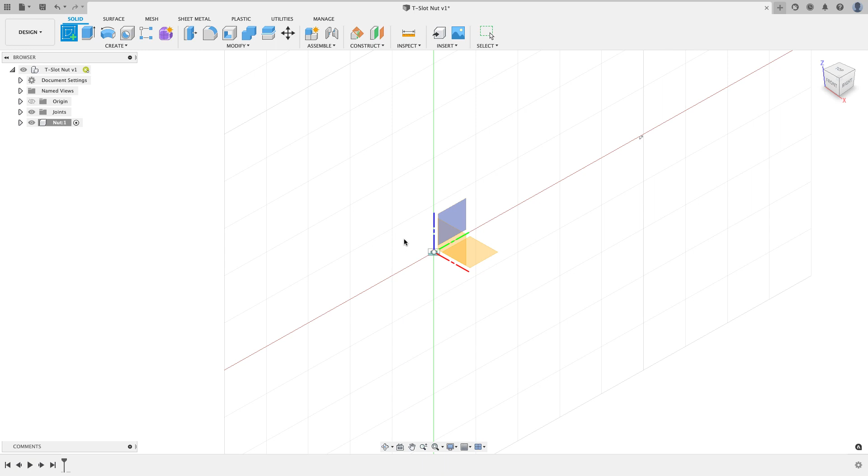I'm going to create a sketch on the front plane, and I'm going to grab the 2-point rectangle, but I really want the center point rectangle. Rather than going through the menu, I'll just come over here to the sketch palette and choose center point rectangle. Drag this out. For a height, I want this to be 0.5625.

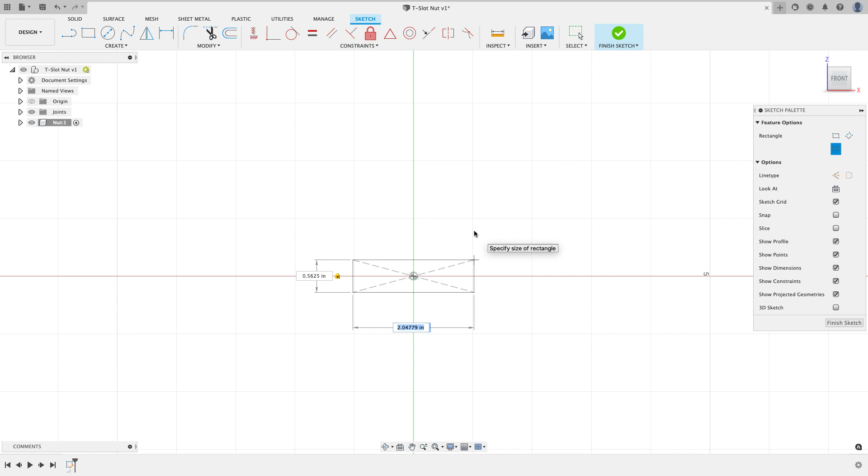For a width, I want this to be 22 millimeters. Now I'm working in inch units right now, as everybody should—sorry, kidding, that was a joke. I'm working in inch units, and rather than converting it, I'm just going to have Fusion do the heavy lifting for me. I'm going to type in 22 and then put mm after it, and Fusion, when I hit enter, will convert that number for me, and I don't need to know what the conversion factor is.

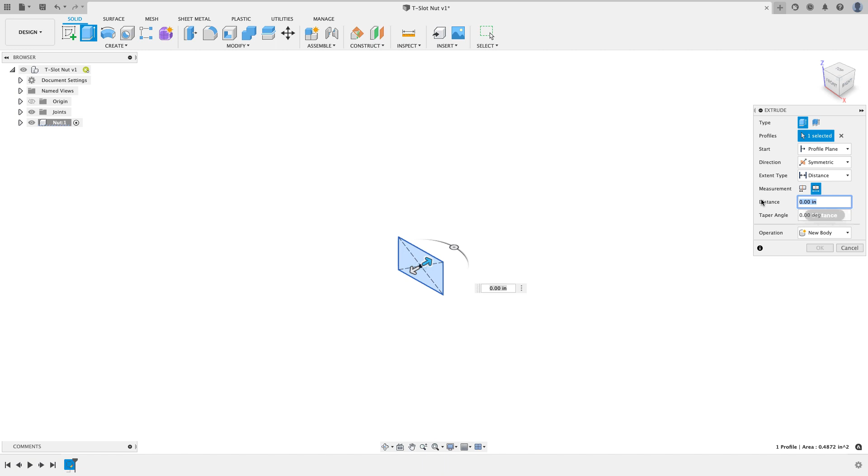I'll finish the sketch, and now I'm going to extrude that. I'm going to extrude it symmetrically, a total distance of 1 inch. My stock pieces are about 1.03 inches, so I should have enough to clean up all of these pieces.

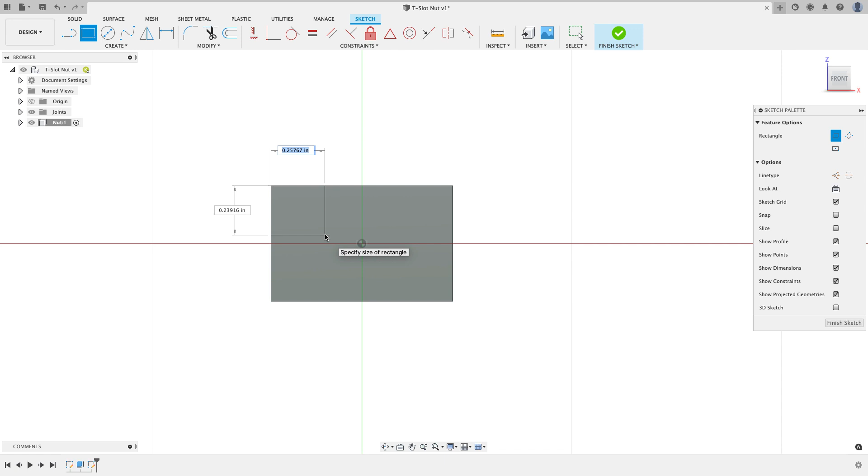Now I need to put the little shoulder cuts on, so I'm going to create a sketch again on the front face of the part, and I'll use the 2-point rectangle this time, anchored to the upper left. I don't know what the depth is, but I'm going to hit tab because I know what the width is, so I'll type in 0.125. I'll hit D for dimension, and from the bottom edge to the bottom edge of the rectangle, I know that's 0.335. I'll hit enter, and finish my sketch.

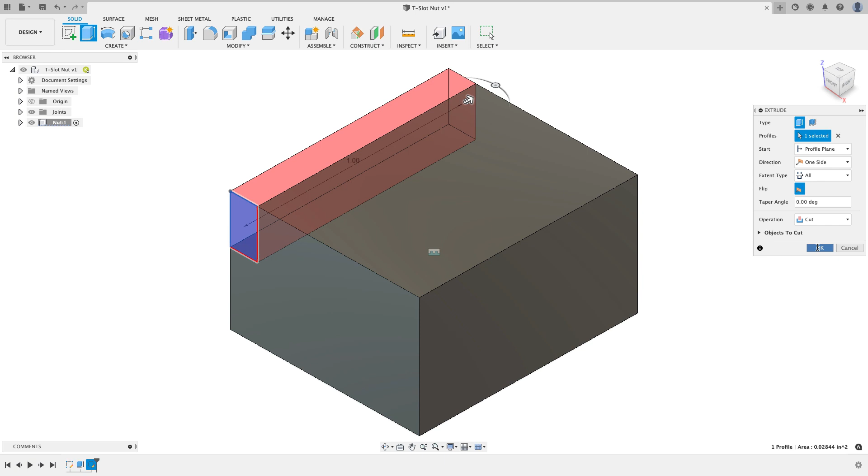Now I can extrude that. I'll just pull it the direction I want to go. For the distance, I want it to go all the way through, so I'll choose all, and then hit OK. I want to mirror that to the other side, so from the create menu, I'm going to choose the mirror command, and it's set to mirror faces. I want features, which means I can either select it on the model or grab it on the timeline. Either way will give you the same result.

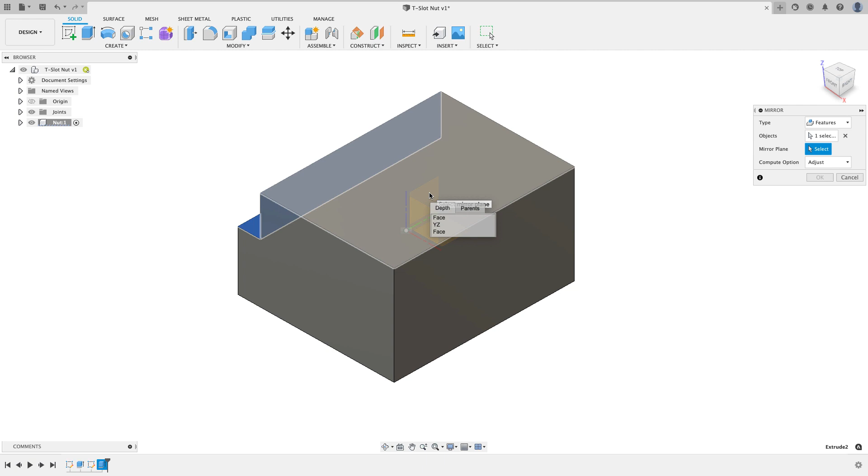And on the mirror plane, I want to use that origin plane that I can see, which is a little hard to get to right now. However, if I just put my mouse over it and I left click and hold until the select other menu appears, now I can stop left clicking and click on my YZ plane, and I get the preview of the cut. I'll hit OK.

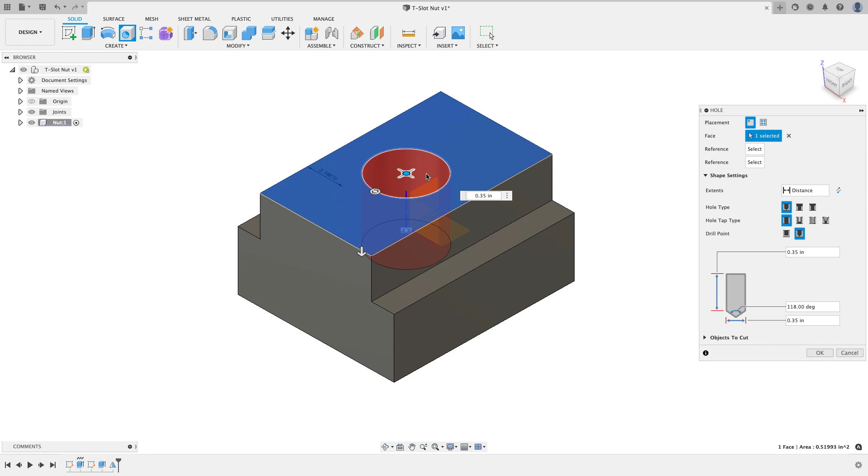The last thing I have to do for CAD work is to put a hole in the center of this part. So I'm going to start the hole command, and I want to put it on this top face, and usually people's inclination is to select exactly at the center. I want to select off the center. Now I can take that blue dot and drag it to the white dot, and when I have it there, I can set my distance as all.

I want this to be a tapped hole, and then I'm going to select a nominal 1/2 inch hole, and the thread designation is going to be 1/2-13, and I'll hit OK. And now the CAD work is done. It might be a good idea to save here. Now I can switch over to the manufacture environment.

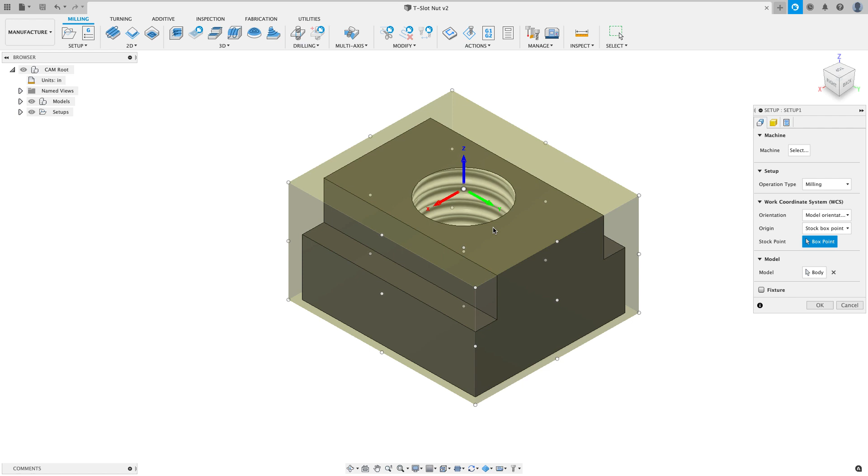I'm going to rotate my model slightly. This is how I'm going to be looking at it in the vise. And so I'll say I want to create a new setup. I want to change the X direction. So I'm going to click on the base of the X, and the face I want to be perpendicular to. So my work coordinate system is now where I want it.

And I'm just going to go to the setup tab. Let me drag this out so you can see the names. I'm going to go to the stock tab and choose a fixed size box. And the first thing I like to do is set my round to nearest field to be 0. Now my stock and my part are exactly the same size. So I'm going to tell my stock it's a little bit longer than what it really is.

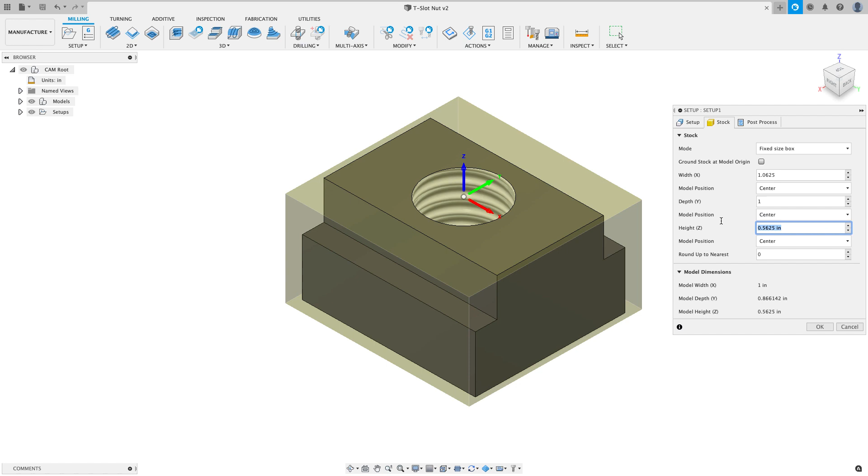So most of the pieces, like I said, are cut to about 1.03. I'm going to say that this is 1.0625. It never really hurts to say your stock is a little bit bigger, and it can hurt if you say your stock is a little bit smaller. On the Y, my stock is going to be 1 inch. And for the Z height, it's 0.75. If I look at my stock, it's split the stock equal top and bottom.

I want to change the Z model position to offset from the top. And I'm just going to take about 10 thousandths off the top to clean the steel up. And that should do what I want. And then on the post process tab, I'm going to change my WCS offset from 0 to 1 and I'll hit OK. That'll give me a G54. So now I'm ready to start adding tool paths to my part.

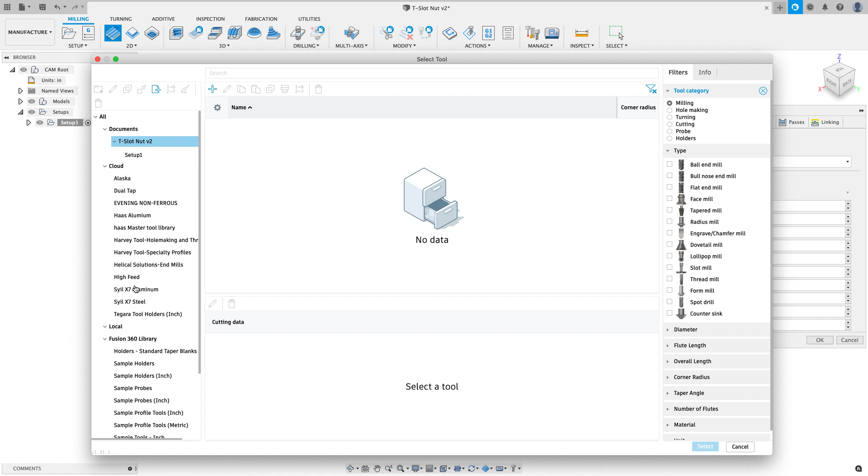Now I should note, I've already pre-set up my tools with the right feeds and speeds for what I want for this material. So I won't be picking any feeds and speeds. I'll just be picking tools as I go. I'm going to choose the facing operation and I'm going to go select a tool out of my Syil X7 steel library. And I'm going to start with this 3/8 inch helical tool. And you can see I've got a couple presets for adaptive clearing and contouring.

I'm going to just select the tool and then I'm going to use air on the geometry. I'm not going to select anything. On the heights, it's going to go from the stock top to the model top, which is good. On the passes, I'm going to do a pass extension of 0.2 inches and I'm going to do a stock offset of 0.1. Just make sure it cleans everything up.

Now it defaulted my step over to what my adaptive clearing step over is. I can get away with a much larger step over here. So rather than using that 0.045, I'm going to right click and say reset to system default, which is slightly less than 3/8 of an inch. And I'm only going to climb mill this tool path. Linking tab, I'm going to choose extend before retract to get the tool all the way off the stock before it retracts and hit OK.

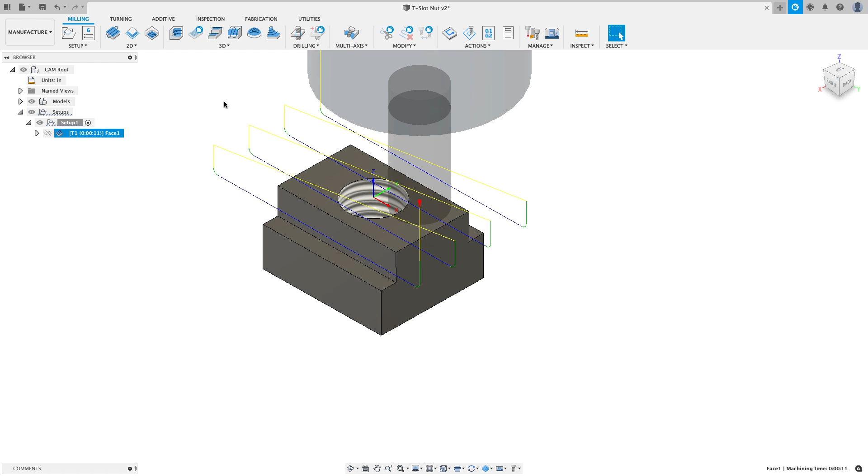And there I should just get a simple facing operation. I'll do a 2D adaptive clearing with the same tool. Again, air, and then for the preset, I'm going to hit the drop down and say adaptive clearing is what I want to use. For the geometry, I'm going to click on the top edge right there. So you get kind of a blue preview.

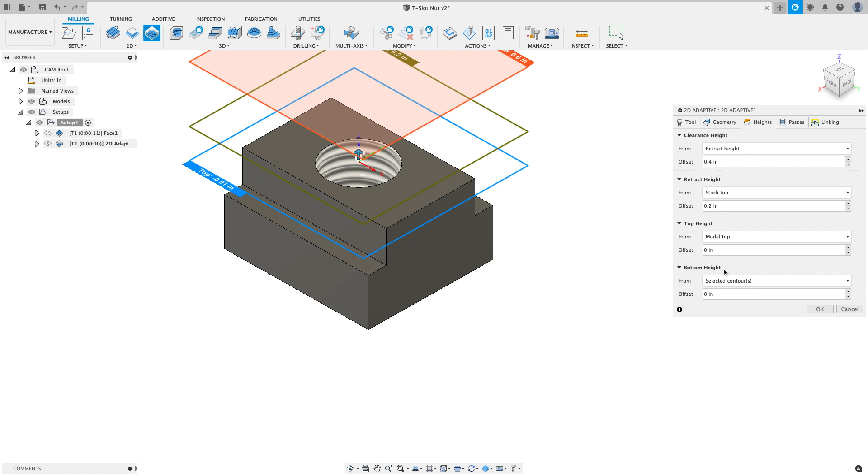Now there's really not that much meat there. We'll see if Fusion even puts a tool path on the different ends. If it does, great. If it doesn't, that'll clean up in the 2D contour pass. Because I selected at the very top of the part, I selected at the wrong height. So for the top height, I'm going to say model top because I faced it to that level. And for the bottom height, I'm going to say a selection and I'm going to choose that face right there.

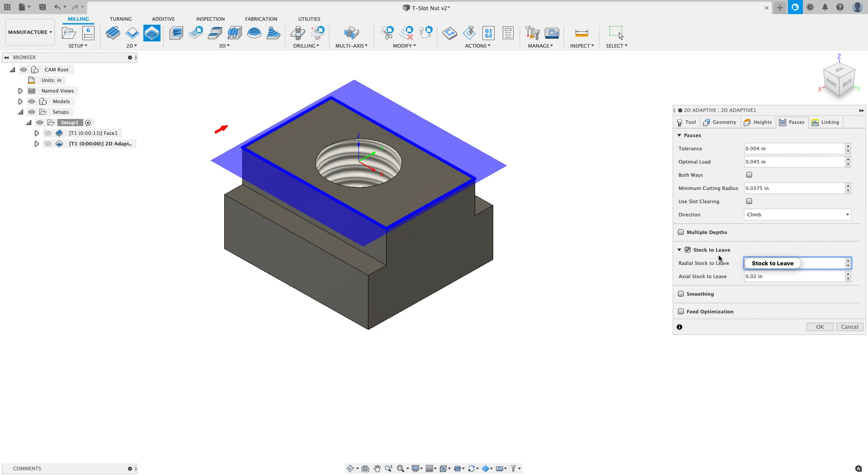On the passes, my 0.045 step over is about 12% of the tool, is what my step over is set to for the steel part. And if I were to turn on multiple depths, it will go 3/4 of an inch deep. I don't need multiple depths for this first step, so I'm not going to enable that. I want to leave about 20 thousandths of an inch of stock radially and axially.

And then I'm going to go over to the linking tab. I'm going to make just a few changes here. I'm going to set my stay-down level to 70%, and my lift height to be 0.01, and my low engagement feed rate, I'm going to set that at 1,000. My machine can't do a cutting feed rate of 1,000 inches per minute, but what it will do is go as fast as it can, and the control doesn't mind if I put a larger number than what it can do. It just changes it to as fast as it can go. So I'm happy with those numbers.

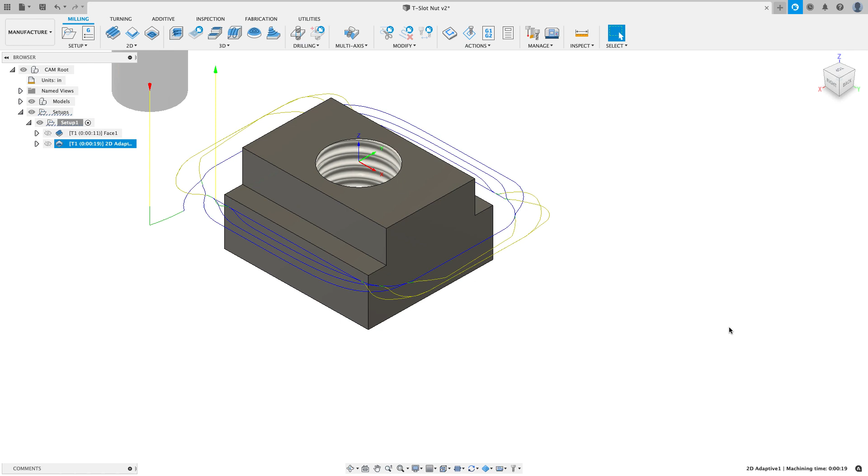I'll hit OK, and now I get my adaptive clearing for that very first step. I'm just going to right click and duplicate that, and I'll edit that. I'm going to throw away my geometry. I'm going to select the new geometry at the very bottom of the part. And then on my heights, I'm going to make a couple adjustments. I'm going to say I want to go from a selection, which is going to be that face, to selected contours, or I could say model bottom.

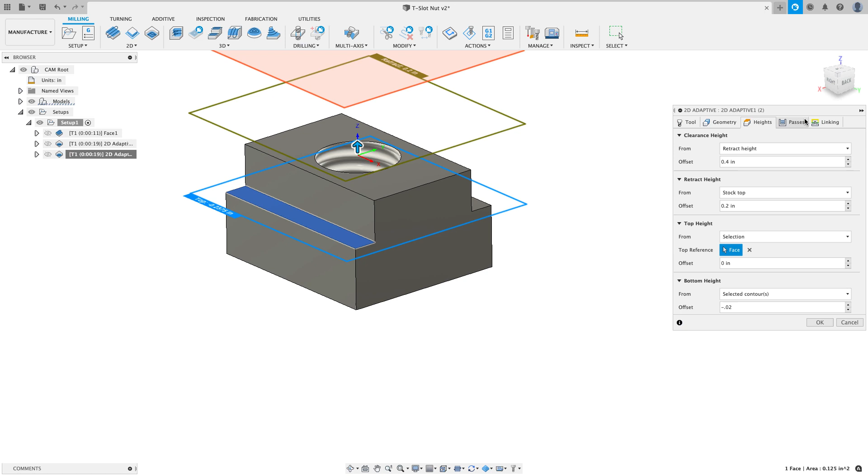And now I want to cut past the bottom of this part by negative 0.02 inches. I'm going to go 20 thousandths of an inch past. The passes should already be all set up for me based on the previous operation that I did. Same with the linking. So now I'll hit OK. And there I get a tool path that just goes and roughs the outside of the part. Now I can work on cleaning the part up.

I'm going to start out with a 2D contour. Same tool. I'm going to click on this edge for the geometry. For my tangential extension distance, I'm going to do about half the distance of the tool. I'm going to type in 0.15 here. That's going to make the tool start in space and end in space. It'll start farther away from the geometry. On the heights, stock top to selected contours is fine since it's only doing one step down.

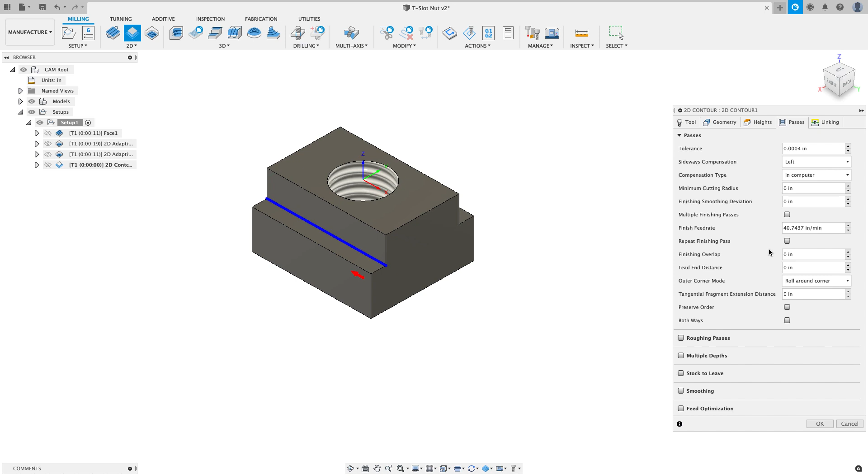And on the passes tab, I'm going to turn on repeat finishing pass. I want to change something in the linking, but before I do, I'll hit OK. And you can see that the tool's doing 90-degree lead in and lead out. I don't need that. I'm going to edit this. I'm going to go back to the linking tab and I'm going to change my lead in sweep angle to be 0. Now what it'll do is it'll go across, retract, come back, make another pass.

I want to do the same thing on the other side. So I'm going to right click and say duplicate this operation. I'll edit this, go to my geometry, throw away my previous selection and click on the new edge and hit OK.

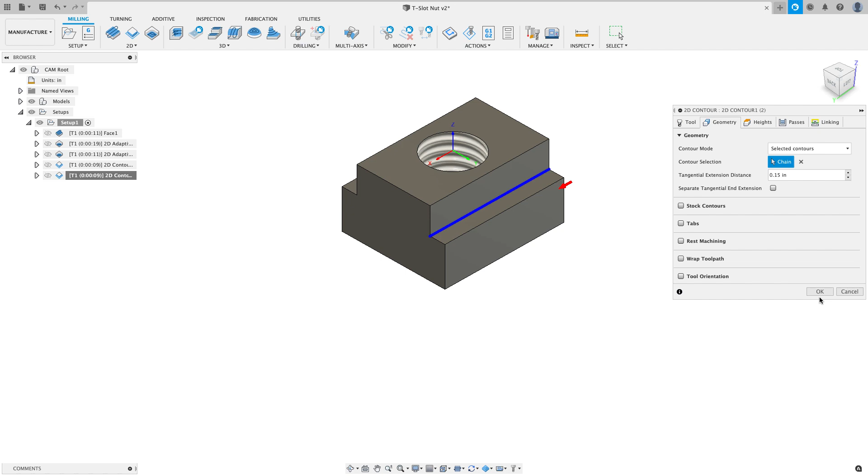And now I've got that cleaned up. I can do that one more time. I can just right click and duplicate that. And I'm going to edit this and I'll go to the geometry, toss that, and choose that edge right there now. Still for the heights, my part is only 0.5625.

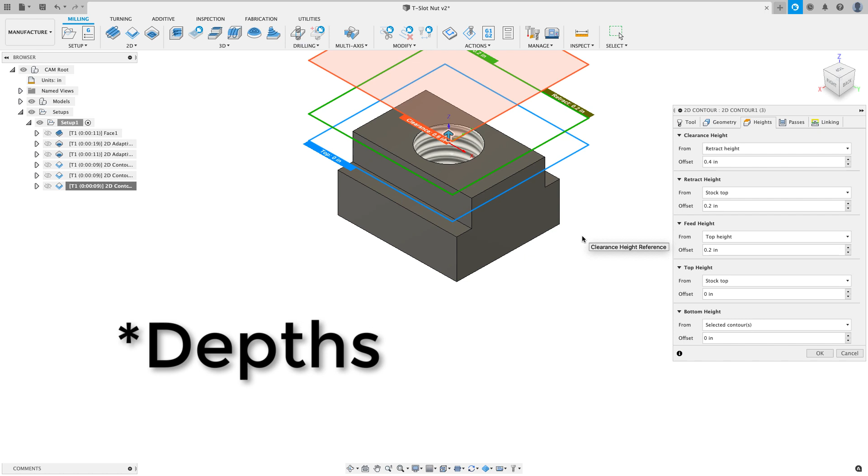I know I can comfortably go 2 times the diameter, so 0.75 deep, so I don't need multiple passes or anything like that, and this is just the cleanup pass around the outside. So I'm gonna go from the stock top to the selected contours, and I'll say minus 0.01. I will go past the bottom just a little bit to clean that up.

And then in the passes tab, I'm going to turn on an option that I don't think people use a lot, which is, actually, let me just hit OK so we can see what we get here for toolpath. So there's what my toolpath looks like. I've got my 0 degree lead in, lead out on, and that's why it's starting in this corner. What I want to do is I want the tool to start off in space, come in, make a lap around, and then finish off in space.

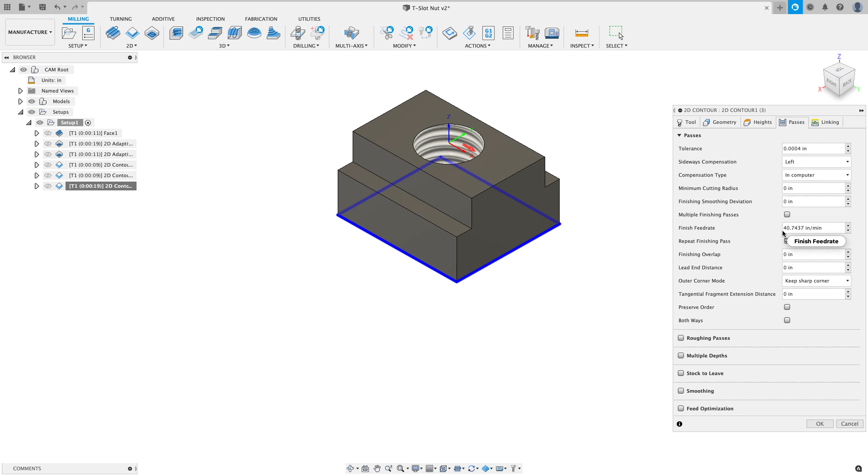So I'm going to edit this toolpath, go to the passes tab, and under outer corner mode, instead of roll around the corner, I'm going to say keep sharp corners. I'm also going to enable repeat finishing pass, which is already turned on because I copied it from the previous operation. I'll hit OK, and now I get exactly the result that I want.

Although it's not starting maybe as far off as I'd like, so I'm just going to go to the linking tab, and I'm going to change the linear lead-in distance to 0.1. Now when I hit OK, you'll see that there's a longer lead in on that toolpath. It really doesn't add any time, but it ensures I really start out in space.

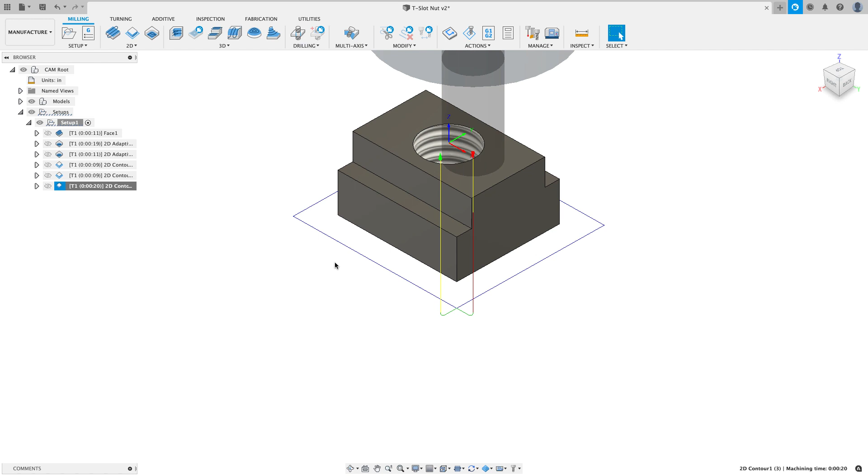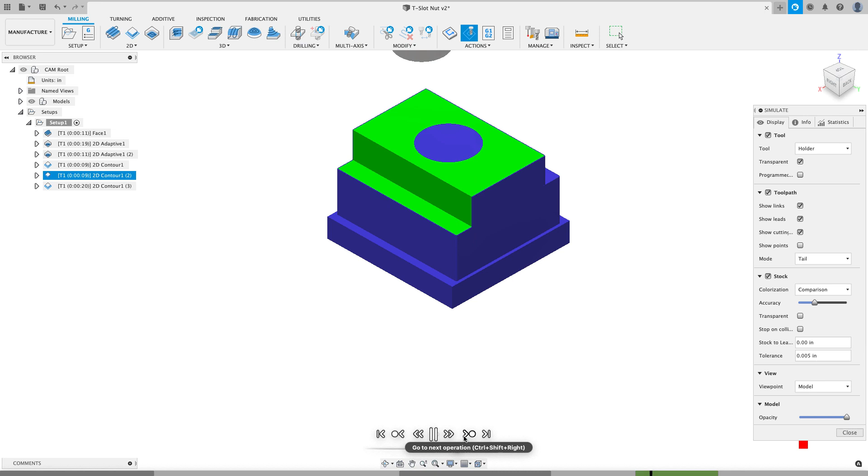So now if I do a quick simulation, at this point, I'll turn the transparency off. If we hit play and let this run, you can see we get the facing operation. Then we get our adaptive clearing that roughs the majority of the material off on the first step, finishes the second step. Then we do a contour pass, another contour pass, and a contour pass all the way around the part with a finishing pass, and away we go.

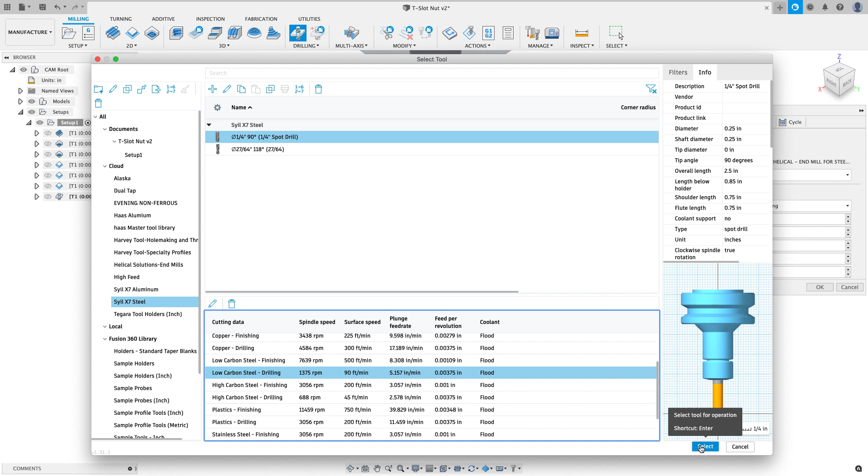So I'm just gonna go down to low carbon steel drilling. This is a tool I copied from the Autodesk tool library and just put my holder on it. And then now I'm gonna go to the geometry and click on this hole face. And for my heights, I'm gonna say hole top for the top height, but for the bottom height, I'm also going to say hole top.

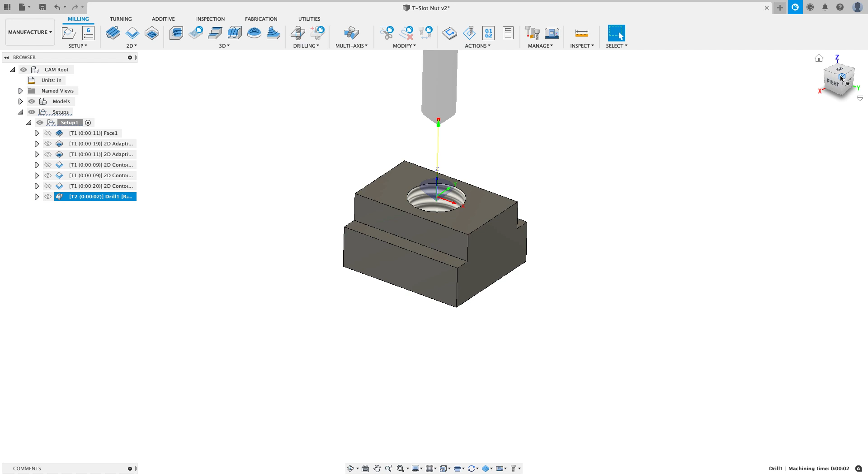And then in the bottom height offset, I'm gonna say negative 0.03. Maybe I'll just peck down 30 thousandths of an inch just to get a little point there. On the cycle, drilling rapid out will be fine. And there's my preview of the spot drill that I'm going to do. I'll come back and do a drilling operation now.

I'm gonna select my tool again out of the Syil X7 steel library, grab my 27/64 drill, and again, low carbon drilling. For the hole, I'm gonna select on that face, and for the heights, hole top to hole bottom is fine. I wanna drill through the bottom, and I'm gonna put a 0.1 or 100 thousandths breakthrough depth on there.

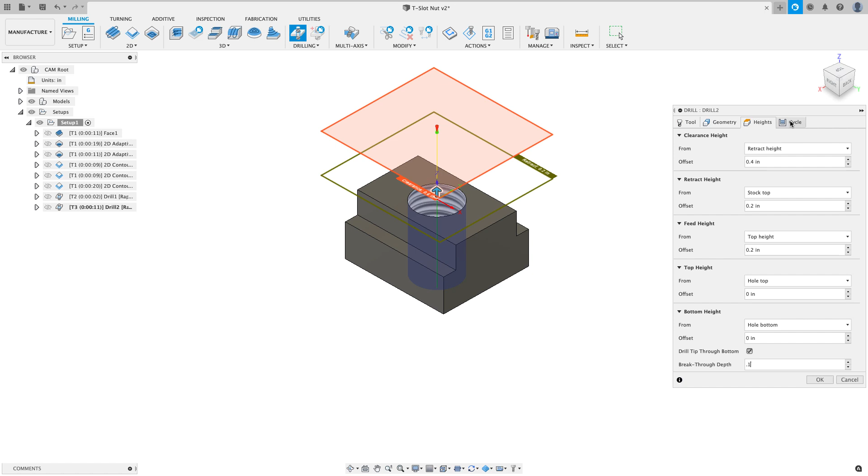On the cycle, I'm gonna choose chip breaking, partial retract, and I'm just gonna make one change here. For the accumulated pecking depth, I'm gonna set that to be 0.25. So every time the tool goes down a 1/4 inch, it's gonna pull out and clear the chips before it starts its next peck back into the material. If we look, the tool is clearly going through the bottom, so I'll hit OK.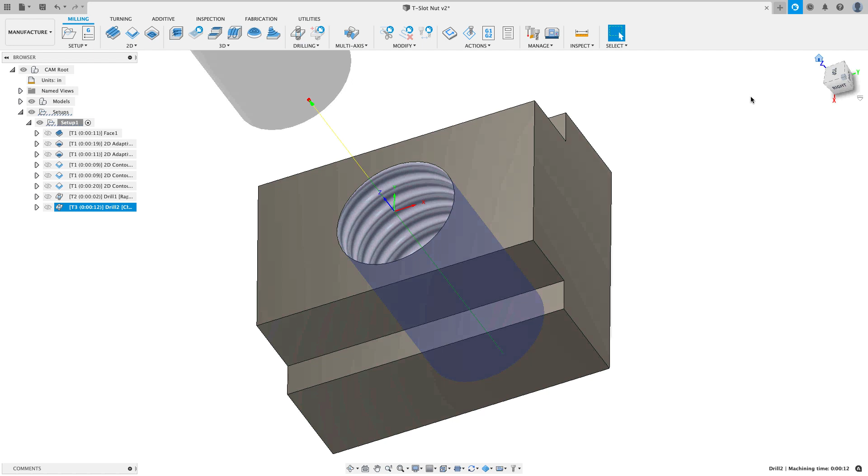And I've got my drilling operation. The last thing I want to do on this side is a thread milling operation on my thread, which is 1/2-13. From the 2D menu, I'm going to select the thread, and I'm going to again go grab the tool out of my library, X7 steel, and I'm going to grab this Harvey thread mill.

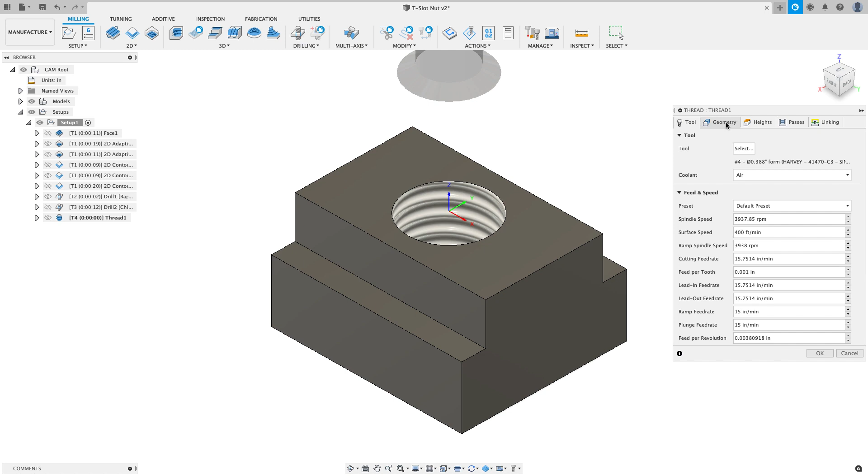I've already set the presets for steel. I didn't make multiple presets, so I'll select that, and now I'm going to grab the geometry, click on that. For the heights, it's going to go from the hole top to the hole bottom, which is fine. Typically on a through hole like this, I'd make the tool go farther past the bottom, but I actually want this so that when I put a fastener in from the top, when I tighten it down, I can't tighten it so much that I end up hitting the table. So if I don't complete all the threads, I can't turn the fastener into the table. So I'm going to leave it hole top to hole bottom.

And the reason I say that is the tool, maybe we can look at that in a second, doesn't start exactly at the bottom of the hole when you see the geometry. On the passes, I have a couple questions to answer. The first is the thread pitch. So this is a 1/2-13 thread, which means that there are 13 threads per inch. And so in order to calculate the thread pitch, I can either do the math on it or I can let Fusion do it by typing in 1 divided by 13. And now it'll calculate that value.

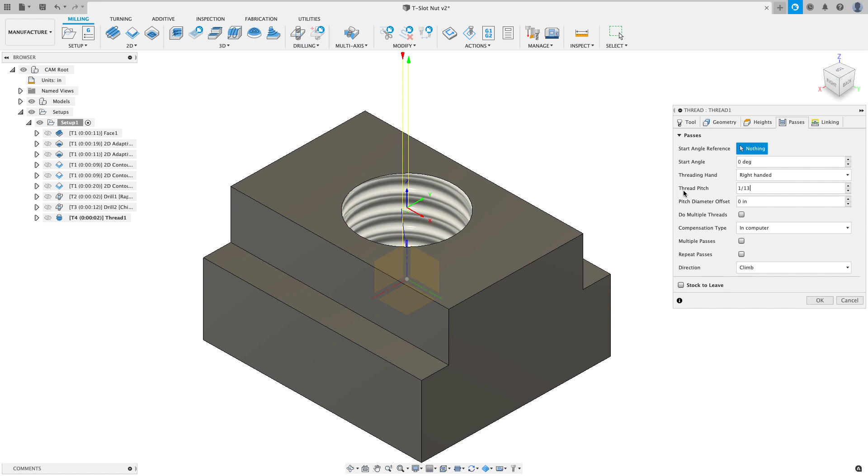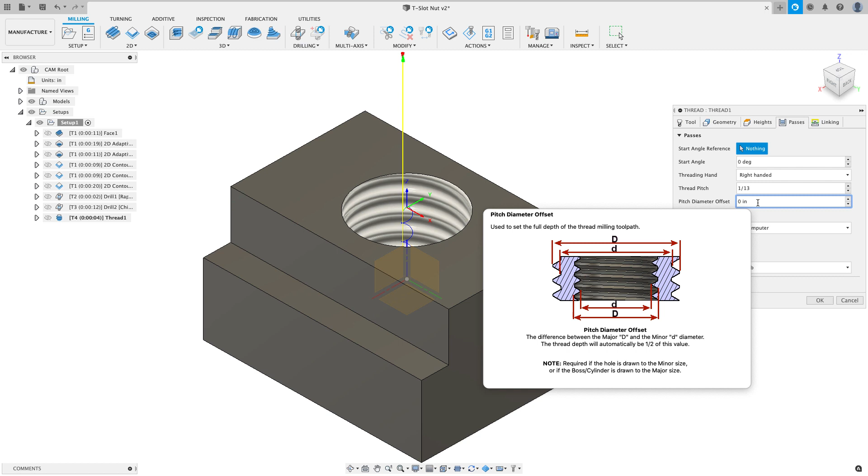The next thing I have to do is the pitch diameter offset, which is the difference between the major ID and the minor ID. This is a 1/2 inch hole, so the major ID is 0.5, and the minor ID is 27/64 or 0.421875. And if I do the math on that, the pitch diameter offset comes out to be 0.078. So that's what I'll do for the first one, and I'll see how the fastener fits after I do it. I want to do that in multiple passes.

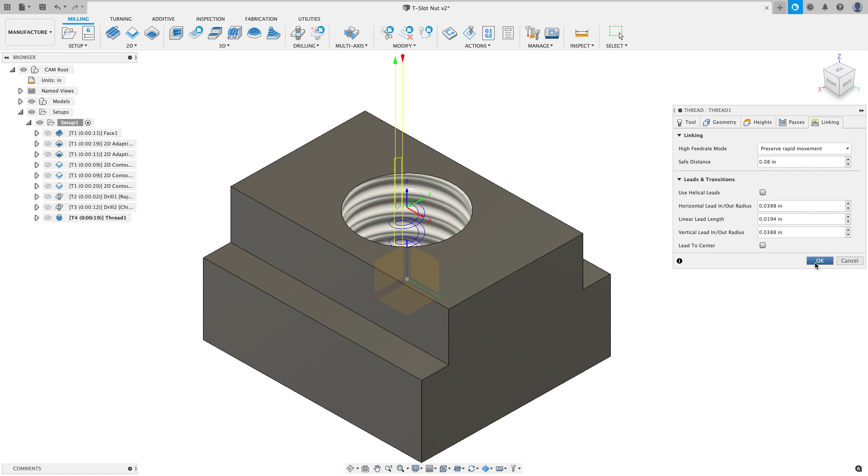I'm going to do 2 passes of 20 thousandths of an inch each pass for the total depth. So you can see I'm about 80 thousandths deep. So that would be 40 per side. Split that in 2. So about 2 steps of 20 thousandths of an inch. On the linking tab, there's one thing I'm going to change, but I'm not going to change it until we run the simulation. I'll hit OK. Maybe I'll hit save here just in case.

And now I'm going to click on my setup, simulate, and really all I want to see is that threading operation. What I was talking about earlier is the control point of this tool is at the very bottom, but the threads don't start cutting until a little higher up. That's why saying hole bottom isn't going to give me full threads past the bottom of this part. So there's my thread mill.

And if I hit play, what I should see if I slow that down, let me go back a little bit, go back to the previous operation. You see the tool turns red. The end of the tool is colliding as it goes into the material. So we're going to work on fixing that. There you can see the collision right there with the material being removed.

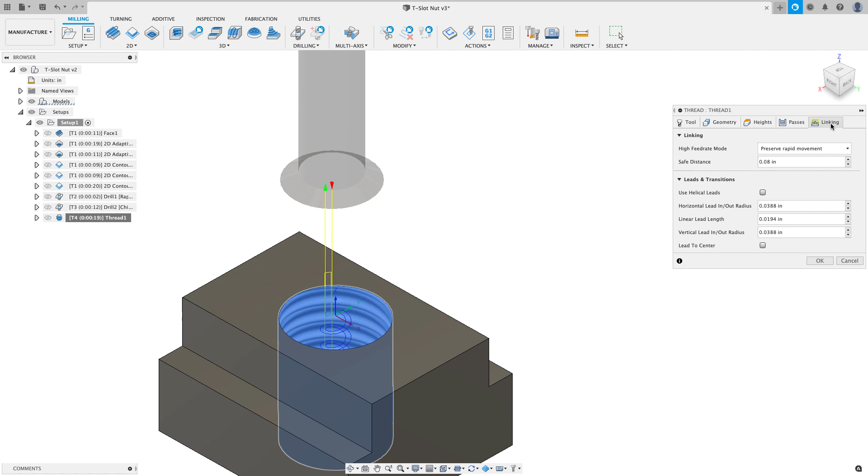The other thing that throws people off a lot when they thread mill is when you thread mill an internal hole, Fusion starts at the bottom and goes to the top. So a lot of people expect it to go from the top to the bottom, and it gives them a little heartache. So let's see if we can fix that. I'm going to edit the thread operation, go to the linking tab, and check this box called lead to center.

Now I'll hit OK. If I simulate this entire thing over again and I click on my thread operation, now what we'll see if I slow this down a little bit is the tool goes directly down the center line of the hole, and then it starts to step over when it gets to the bottom, and no longer do I have that little crash.

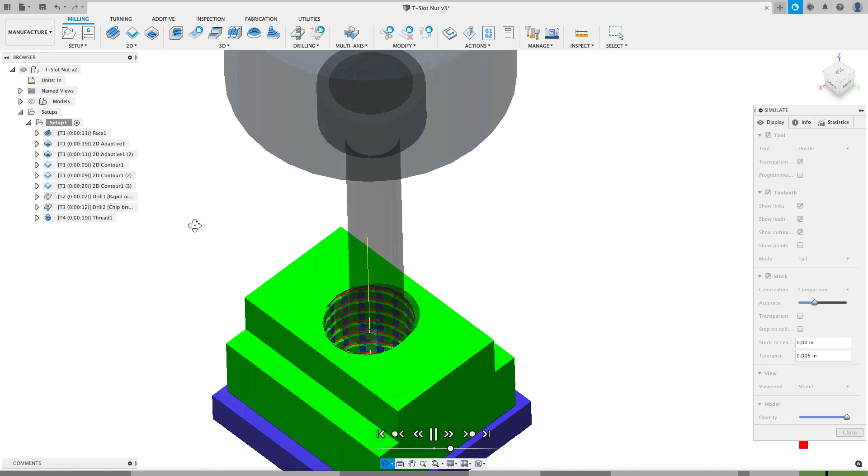Another simulation trick you can do is shut off your models so you can see your threads better. Now you'll see a lot of red in the thread, and that's okay because Fusion models the hole at the minor diameter. So when this cutter is cutting into the thread depth, that's exactly what's going to happen. Fusion thinks a gouge has happened, but in this case it's a gouge we want. I'll hit OK, turn my model back on, and that completes my topside setup.

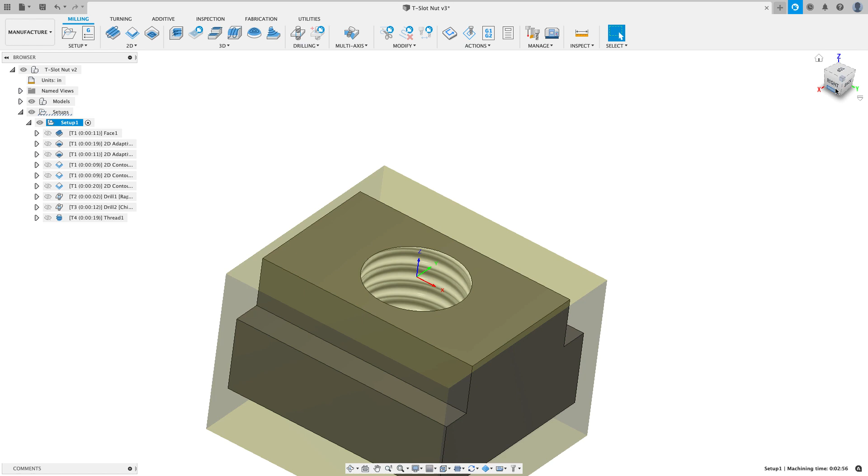Now I'll decide whether to flip the part front to back or left to right. I'll flip my part left to right and create a new setup. I'll click on my Z arrowhead to flip it the direction I want, and click on the base of the Z in the face I want to go to.

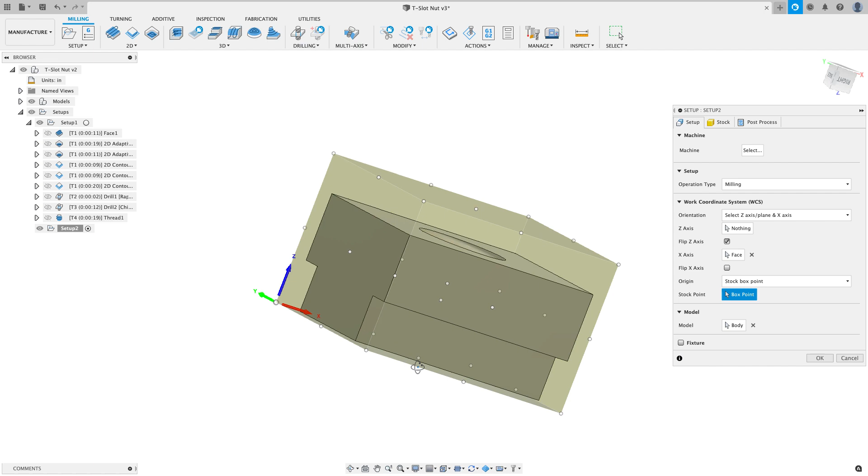I'm going to choose a stock box point, but this time at the bottom of the model down here. Actually, I'll change my mind and do a model box point instead, choosing that point right there. Theoretically I won't be able to accurately touch off on this part, so I'll put some kind of vise stop or vise jaws with parallels across that I can push up to so I can touch off.

I'm going to go to my stock and choose fixed size box, using the exact same size as before. I'll set my round up to nearest to be 0. For my width, I'll say 1.0625. For my depth, I'll set this to be 1, and for my Z height, 0.75. For the model position, I'll say offset from bottom and set this to 0 so the machined surface on the bottom is exactly on the parallels it's resting on. Now that I have that set, I'll hit OK.

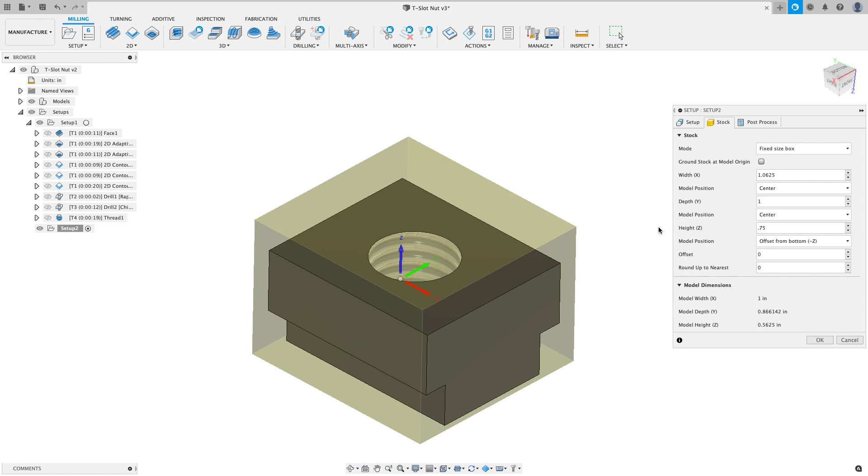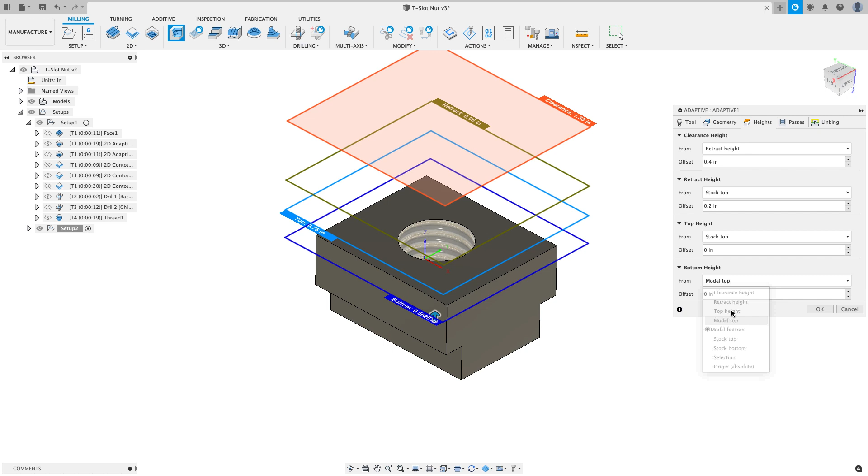I'll start out with a 3D adaptive clearing this time. I'm going to grab a tool from my document, my 3/8 inch end mill, and use the adaptive clearing operation for that. On my geometry, I'm not going to select anything. On my heights, I'll cut from the stock top, but instead of model bottom, I'll say model top.

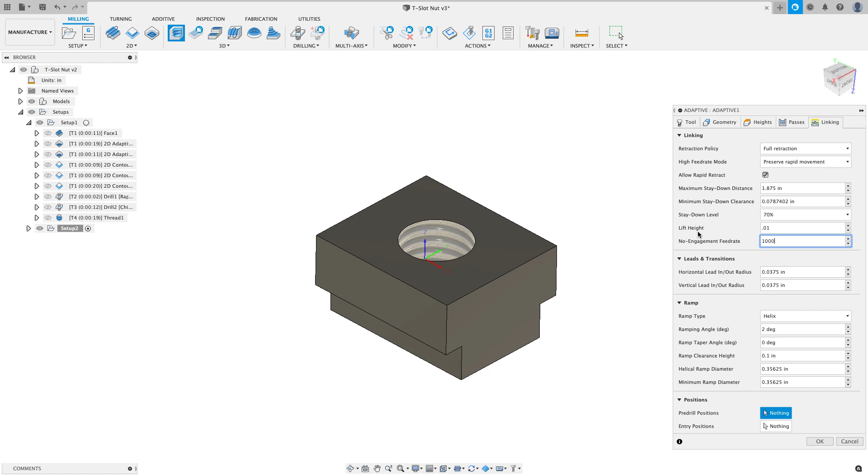Over on my passes tab, everything should be set up the way I want. I'll set a negative 0.05 for the radial stock to leave, so it cuts outside the bounds of the stock for the XY. For the axial, I'll set this to a positive 0.01 so I have something to face off after this. On the linking tab, I'll set about 70% stay down, 0.01 lift height, and a no engagement feed rate of 1,000. I'll hit OK, and now we should get a toolpath that just goes and takes that hat off.

Then I'm going to steal my facing operation from the top. I'll copy this, right click on my setup and say paste, then right click on that facing operation and say generate. Now I have the backside operation done - I just took off that hat of material that was left over, faced the bottom of the part, and everything should be done with this part.

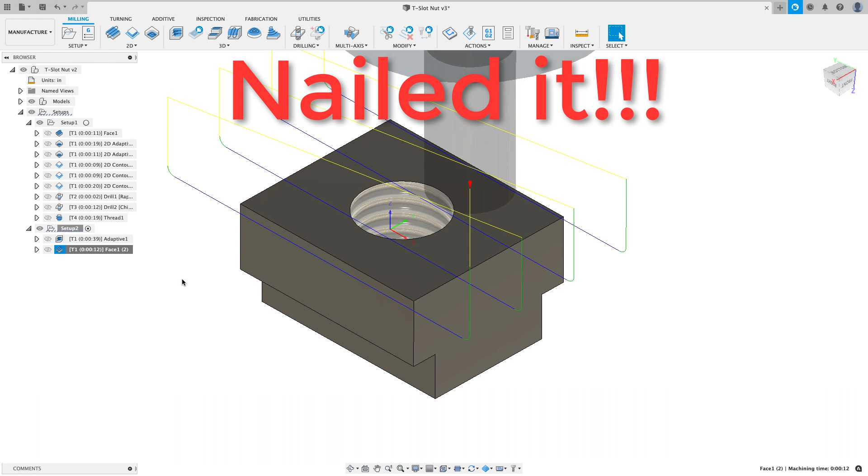I don't know what I'm sitting at for time right now - hopefully I was pretty close to that 20-minute mark. You can see it doesn't take that long to draw and CAM a part inside of Fusion, especially when you have things set up like your tools and presets.

So what we're going to do in a future video is take this part out to the Syil, and we're going to machine this thing on the Syil X7 so you can see how that machine cuts steel.